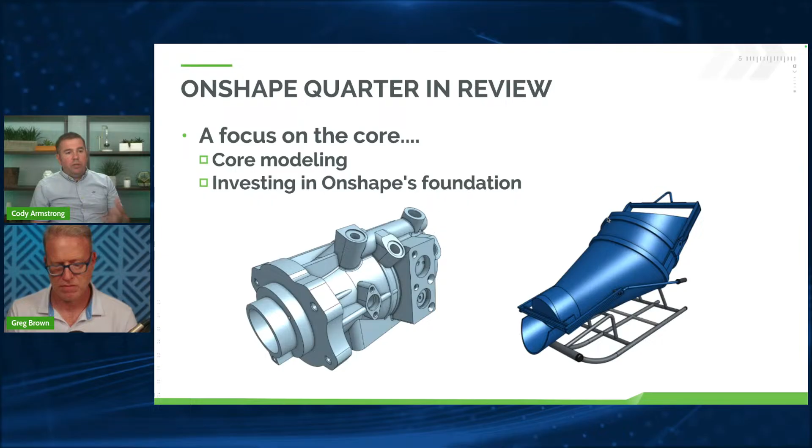And that extends not just to core modeling features like I discussed just a moment ago, but also investing in Onshape's foundation. And that's something I think is really valuable. Something we got a lot of feedback from users on was they really appreciated that time spent investing in Onshape's foundation. And what I really wanted to do was pass things over to Greg and give a brief breakdown into what we did this quarter to focus on the stability and performance of Onshape.

Yeah, thanks, Cody. And definitely this is something a little bit different from the regular schedule of the 17 releases every year, where we jam as many fantastic new things as possible every release, and Onshape's platform is getting wider, broader, and deeper in every possible way. But we did make a very strategic decision in this last quarter to spend 2 whole releases dedicated to what we call technical debt.

And some of the things here, as Cody said, are really dedicated to ensuring that the core, the foundation, the underpinnings of the Onshape platform are as robust and scalable and solid as ever, and also providing a platform that will carry us many, many years into the future. So the dedication of that is really around 2 things.

Firstly, stability and performance. So this is why we did it. We want Onshape to be faster and more stable, more robust than ever before, and providing this trajectory into the future as well. We know this is the number one expectation these days. We don't get or expect a free pass on this, because being the only true cloud-native CAD and PDM system running in a web browser, no one gives us a pass for anything less than stellar performance and stability. And we pride ourselves on that. If we can be better, we will always try and be better, and that's our dedication to that.

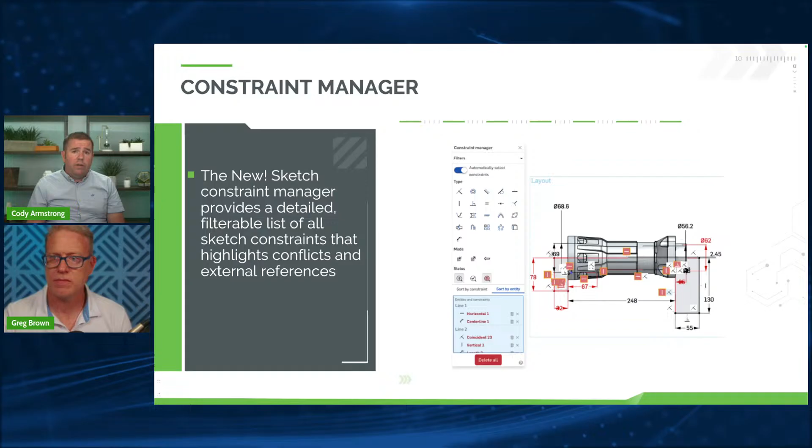It has all these really awesome filtering options that allow you to dig through your constraints and find the one that you're looking for. And I think that's really what this is about, is the ability to dig through and find that one constraint or conflicting constraints and quickly solve that problem, not have to hunt through the entire sketch to find the constraints that you're looking to find. So it's one of those things I think a lot of users will really appreciate, and brand new.

Also in this quarter were improvements to the Repair Manager. Now, if you haven't used the Repair Manager, I'm going to show you how to use it in just a moment. What's really a game changer here is the ability to forward propagate references when using the Repair Manager. And I want to take a second to explain why this is a big deal. The Edit Last Healthy Moment in general uses Onshape's architecture, in particular versions and history, to find that last healthy moment and allow you to compare the two in a repair panel.

And if you haven't used Repair Manager yet, highly recommend it. It's a fantastic tool for fixing your models, right? Fixing broken references, whatever the situation may be. Again, going back to core CAD capabilities, fixing broken references is something we always have to do at some point. And so this gives you a tool to make that easier and faster.

I'm going to go over not just the ability to use it, but how do we propagate forward those changes? So if you have a change to a reference, how do you change it in one place and then push that to all the places where that reference was used? That's really what the improvements around Repair Manager are about. And it's something I think is really a game changer for those that are manually repairing geometry or references today to use that Repair Manager. I'm going to go over an example of why I think this is such a big deal in just a moment. But definitely one of the areas that I would highlight as something we've done that's very unique to Onshape.

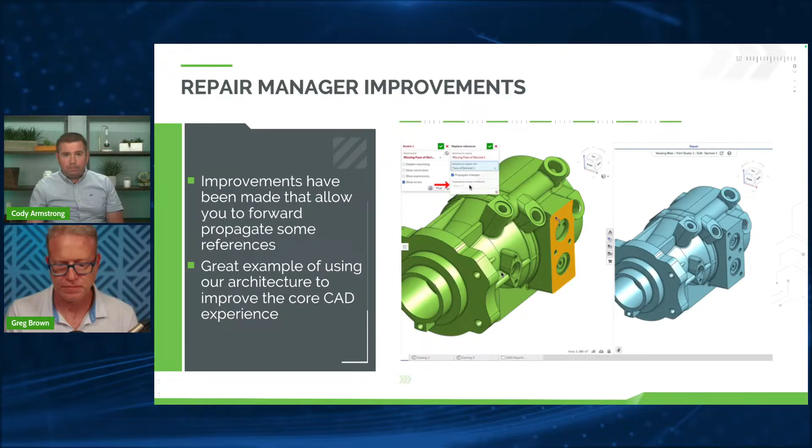And of course, sheet metal. And I mentioned this before, but sheet metal is a core area of focus for us. It's one of those things that we know a lot of users really appreciate. And one of the most requested features we had was the ability to create a conical or cone-shaped sheet metal part, a rolled sheet metal part in the shape of a cone. And we've had the ability to do this for a cylinder for some time, but conical shapes were a limitation that's no longer there.

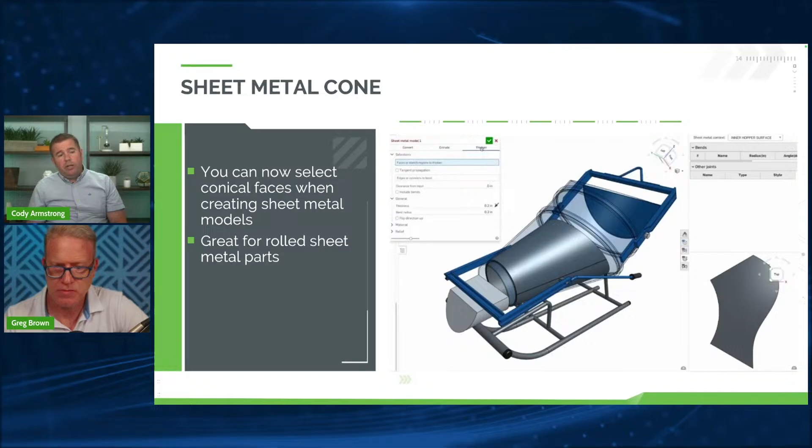So if you're doing a lot of rolled sheet metal cone-shaped parts, this is the tool for you. And I'm going to go over an example of how to use it in just a moment, but it's one of the most requested sheet metal features that we have, and is one that I think a lot of users would really appreciate as they start to dive into things. So that's sheet metal cone, something I think a lot of users, sheet metal users especially, will really appreciate.

And of course, going back to that core CAD theme, drawings. Now, there's a long list of drawing improvements that I could highlight here. So, like I always say, this is just cherry picked, the top improvements that we want to highlight. Definitely go through the what's new, go through the change logs if you really want a deep dive into those improvements. What I really want to highlight is two improvements that a lot of users requested, and a lot of users will really appreciate. And they're subtle things. They're kind of quality of life improvements, but I think will make a big difference in the day-to-day process of creating drawings.

The first, automatic center marks. Like if you have linear patterns and you're using lots of linear patterns in your geometry, adding center marks was a tedious task in the past, and that's totally automated now. And you don't have to do anything for it. It's just there as a default behavior. And it's a really awesome thing to enable for our users.

But also another one that was really highly requested was the ability to define projected views and section views on views with breaks. That was something that many users requested. So if you do a lot of break views, the limitations around the ability to project or section from that were there in the past, but they're no longer the case. And so now these things are possible. These things were highly requested.

Drawings is one of those things with a long tail of capability or functionality, and we want to make sure that we support every possible view option and pattern option. So drawing improvements, if you were to just count sheer number of improvements over the last quarter, this is one of the areas that got the most attention. But the two that I would really highlight are really quality of life improvements that I think a lot of users will benefit from: automatic center marks and the ability to project and do section views off of a break.

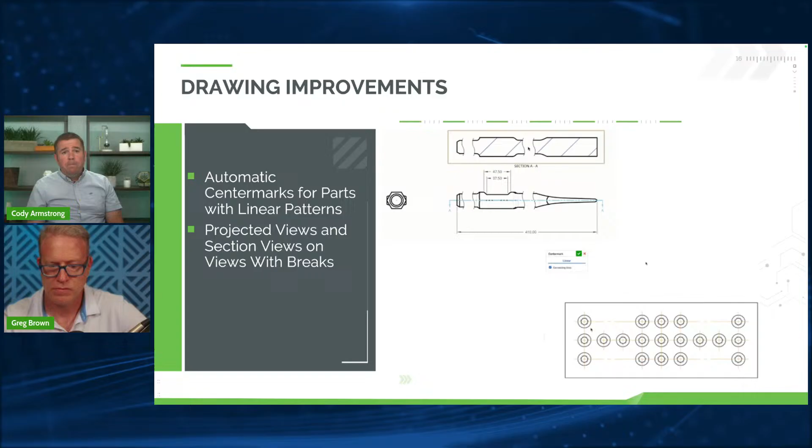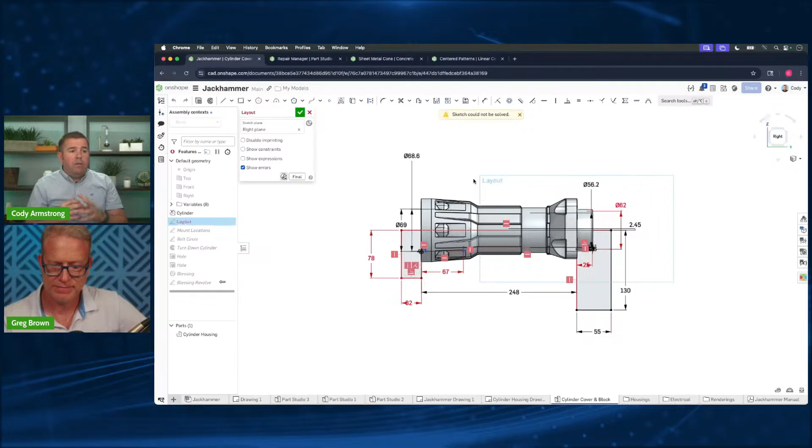So without further ado, I'd like to dive right into a few examples of this. So bear with me for a moment. I'm going to jump into Onshape here. And I want to start with the constraint manager. And the reason I think this is so important is because it's something that we do all day long. So if you do a lot of parametric CAD, you inevitably are faced with a situation where your sketch looks like this, right? And you have red errors everywhere, and maybe you add a dimension or constraint, and suddenly everything blew up, and you don't know how to fix it.

And so oftentimes what we did in the past is you would manually hunt through and figure out what was the last constraint I added, what's it conflicting with, let's delete this, try that, and so on. But there was never a way to just look through the entire list of constraints and pick them out, or to filter them by a specific subset or category. That's what the constraint manager really gives you. And so I can't recommend this tool enough. This is something I think will impact all Onshape users out there, and it's something I think they'll really appreciate.

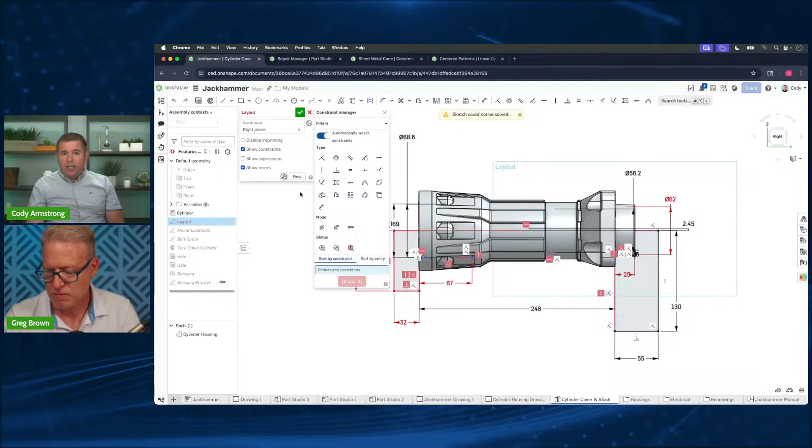In the sketch dialog, you'll have a little button that says Sketch Diagnostics. And in that, you'll see the new Constraint Manager. That's how you launch the Constraint Manager. You'll see the dialog pop up here. And what's really neat about this is, of course, you can do things like filter. That's really, in my opinion, one of the biggest applications for this: I just want to know, show me all the coincident constraints, right? I can do that. I can select coincident, and here are all the coincident constraints in this sketch.

But what's really nice is you could do multiple layers of filters. So let's say, show me all the coincident constraints that have an error. Now I have that one, right? So I can see that constraint.

Or I can filter by other things. Show me all of the external constraints. Of course, external constraints are geometry that's constrained to something outside of that sketch. But now you have a quick way to filter that and say, show me the constraints that are just external or internal.

One of my personal favorites is actually in context. If you ever do a lot of in-context design, knowing which constraints are tied to a contextual relationship rather than just the sketch is a really useful tool. And the ability to just filter by that quickly, I think, is something that a lot of users will really appreciate.

But again, the things I would stress is just the ability to filter through and find all of the errored constraints that you may have, or all the coincident constraints you may have, or the external constraints you may have. And I think one of the common applications for this is I have a sketch. Everything is errored out. I don't know why. Maybe I just want to purge all the overdefined constraints and start fresh. And it's easy for me to just select errors, delete all, and it purges all of those constraints that have an error.

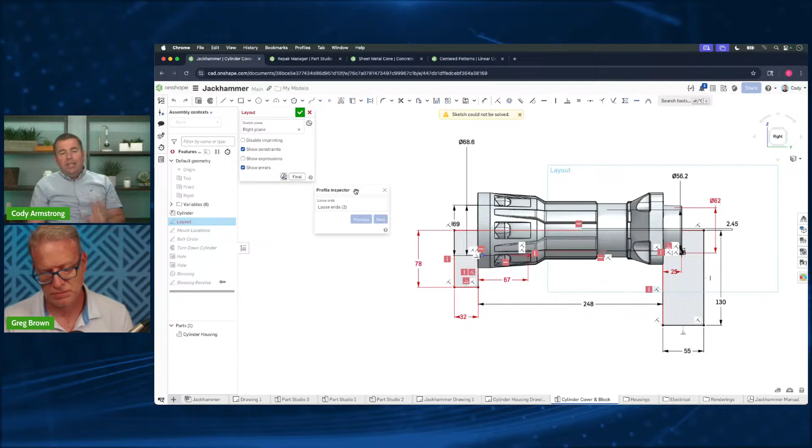Now, a brief tangent while I'm in the sketch diagnostics. This did not come in the last quarter, I believe it was the end of last year, but the Profile Inspector is also in the sketch diagnostics. If you haven't used Profile Inspector, highly recommend it. It's a great tool for finding small profiles or small gaps in your sketches that could be causing problems. It's about 6 months old now, but it is one of those areas that I think a lot of users will really appreciate. The ability to find the tiny lines or tiny gaps and quickly isolate them and fix them is something a lot of users requested.

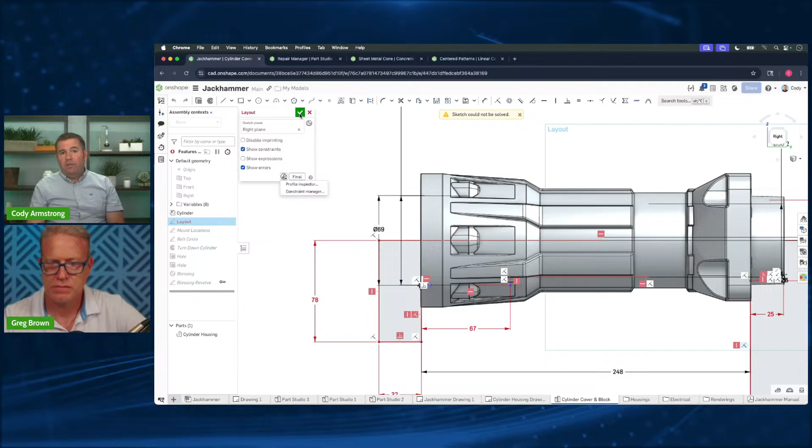And going back to the core CAD theme, core CAD is profile inspecting, it's constraint managing, it's fixing core sketches. And that's really what we're focused on here. The tools for the constraint manager are things that every user at some point will benefit from. It doesn't matter what kind of products you design, there's a strong chance Constraint Manager is going to be part of your day-to-day workflows. And the same goes for Profile Inspector. Both of these I would define as core CAD features that everyone's going to use and really benefit from. So that is Constraint Manager with a quick plug for Profile Inspector. If you haven't used it yet, highly recommend checking that out.

All right, so that is the constraint manager. The next thing I would like to highlight is the improvements around repair manager. Now, repair manager isn't new. What we've really done is made an improvement that is so awesome that we really need to take a moment to highlight it here. I wanted to not only show you repair manager and the core of how it works, but why forward propagation is so important.

So here's an example. I have this pump that I've imported. This is an imported model, but I've built all of these reference features off of it. So if you ever worked with a model, you import it, you build all these contextual relationships, maybe features downstream of that imported model, and then you get a new import, right?

And then you need to replace all those references. And if you've ever done this, it's not uncommon to see a feature list that looks like this, where once that initial import has been changed, all of the references below it may break, right? Now, it's not a given, but in many situations, that is the case. It will break those references and you have to go back through and replace them.

And we've all dealt with situations where you make a change and it causes a kind of domino effect of red errors. And it's just the nature of parametric CAD. But what we've done here is really change how you fix these problems. And the reason I like to stress this is because we're using Onshape's architecture, our cloud-based architecture that automatically tracks versions and history. We're using that to make the core CAD experience of fixing errors better.

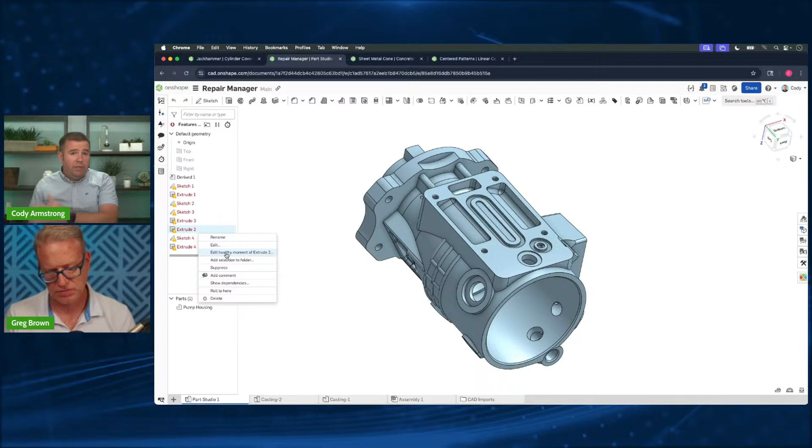But if you haven't tried it, you just right click on a feature that's failing. You'll see an edit last healthy moment of that feature. And what this is doing is it's looking through our versions and history, and it's finding the last time that feature successfully regenerated. And then it's showing you that in the right-hand side. And so you see there, as soon as I hit edit last healthy moment, a flyout pops out from the right, and it says, this is the last moment where that feature was healthy.

And this is the thing that it was selecting. And you can see it there. It's highlighting the face that I've chosen to define for this extrude feature. And the reason this is so important is I can see, okay, a month ago when this was regenerating successfully, that face was the selected entity that drove this extrude feature. So I should replace that with this.

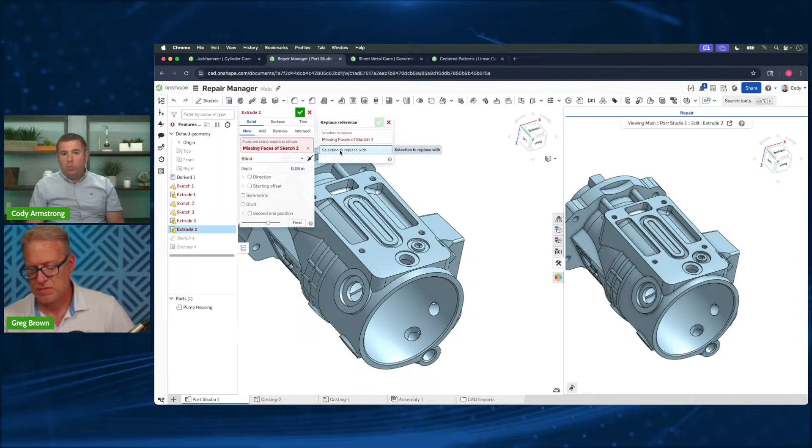Now, Repair Manager has been around for a few months now. What's really awesome and what's really different with this release, the thing I would stress, is this little icon inside of here for replace references. And so if you click this, it'll say, okay, here's your missing reference. What do you want to replace it with? And so all I have to do is select the face I want to replace it with. In this case, I'm just selecting the new face on the new imported model.

But what's really critical here is this is not only replacing the reference in this feature, it's going to go through the entire feature list and find any references to that face and replace those as well. And so really critical, if you find yourself in a situation where you make a change high up in the feature list and suddenly there's this domino effect of errors, chances are replacing some of those references and propagating those changes forward will fix things very quickly.

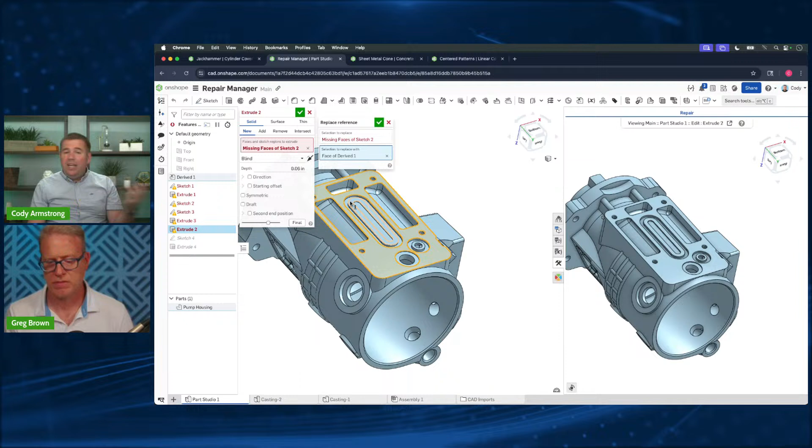And so here's an example where I have Extrude 2, Sketch 4, all of these three features are dependent on this one to exist. And you may have a situation where you've built hundreds of features that are dependent on a single feature to exist. And if that happens, then you can see the domino effect and the amount of time spent fixing it is very laborious. This allows you to say, find this missing reference and replace it in any place in the feature list where it's used. And so now all I have to do is hit the green check. And now I've not only fixed Extrude 2, but I've also fixed Sketch 4 and Extrude 4 that were referencing that same face.

And again, I could have 20 more, 30 more features on top of that that would have also been fixed and forward propagated to fix that issue as well. So it's one of those things I think will make a big difference day in, day out.

This is one of those things, again, core CAD, everyone experiences errors at some point. Regen errors are just a natural part of parametric CAD, going back through and fixing those references, an important part of parametric CAD, and something that we are now doing, I think, in ways that are better than anyone else can because of our architecture, because we have the history and we can see every moment and then push those changes forward.

And the thing I would say about Repair Manager is we shipped it as soon as it added value, right? We shipped it as soon as you had the repair panel and the ability to cross-highlight and fix things interactively, because we saw that added value. But as soon as we had forward propagation, we added that too.

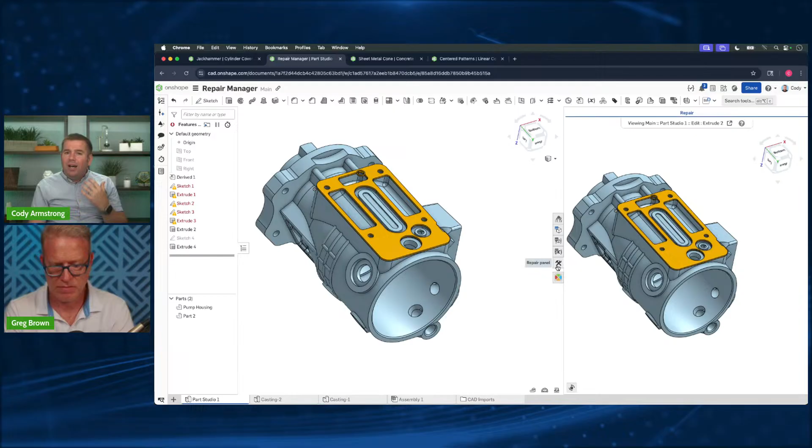And it's not done. This is one of those things that we're going to continue to evolve, because fixing references is one of the most common tasks that users experience. And if we could make that smoother, easier, it's important to us. So it's one of those things that I think is really noteworthy. And I wanted to go out of my way to really highlight that. Not only highlight it, but highlight the fact that we're using our versions and history to make fixing errors better.

And Cody, you made a really important point there about the incremental delivery of this kind of foundational feature. In fact, it's interesting to think back. I remember last year, it was almost to the day a year ago that we released this as an early visibility feature to a few people. It wasn't quite as hot as today is at this end of June, but it was certainly almost exactly a year ago. So yeah, it's interesting that we can deliver value and incrementally increase that for something like this.

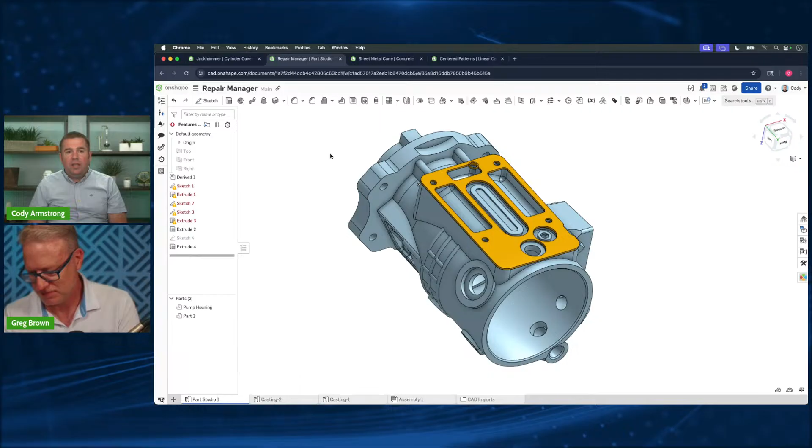But that's one of those things, again, that to me, when I saw it, I was like, wow, as someone who's come from a traditional CAD background, to use the architecture and the history and the ability to track every interaction as a tool to fix the geometry is just genuinely awesome. And it's something I think that really sets Onshape apart.

All right, so the next one that I want to talk about, this is one of the most highly requested sheet metal improvements that we have. And for all the audience out there that's doing sheet metal design, I think you're going to be the ones who really appreciate this one the most. And that is the ability to create a sheet metal cone, or conical sheet metal part.

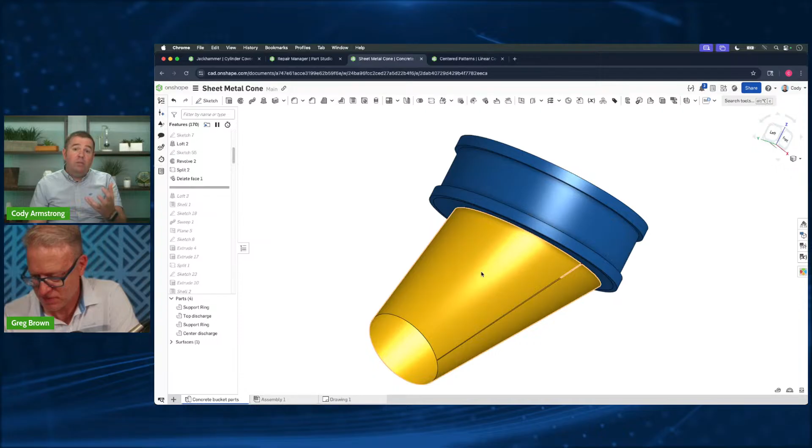So if you're in this situation where you're creating rolled sheet metal parts, we had the ability to do this with a cylinder some time ago, but cones have been a limitation until recently. And the example I'm showing you here, there's a concrete bucket constructed using sheet metal, rolled sheet metal parts that are welded on along a seam. This is an excellent example where you might use a sheet metal cone.

And there's not much to show here. It just works now. And I think that's one of the things I love about Onshape is now when you select a conical surface, you get a flat pattern. There's nothing special about it. It's not a separate feature. You're using the same sheet metal model feature that you've always used. So if you create sheet metal parts, you know the sheet metal model. You have convert, you have extrude, you have thicken, you have the various ways of creating sheet metal parts. Now, when you select a conical face, it just works.

And it gives you that ability to define a cone-shaped sheet metal part and see the flat pattern, the unrolled version of that sheet metal part, so that you can take it and roll it and have accurate values. This was highly requested, a lot of users have asked us for this.

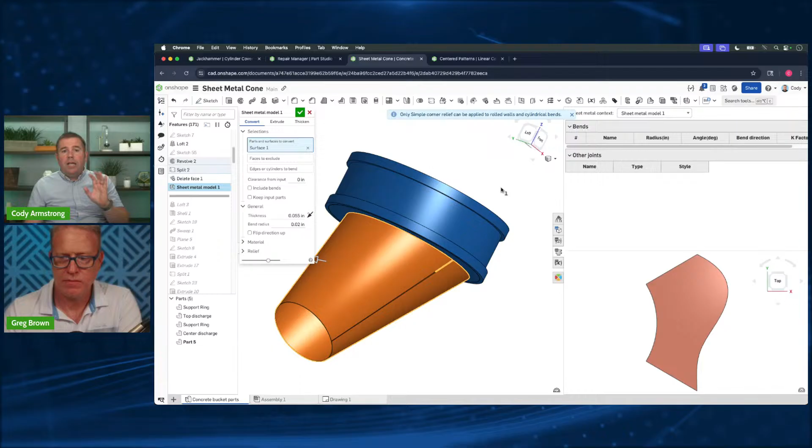Now, the last thing I'm going to mention is you see me using convert to do it, and that works great. You can also use thicken. In this situation, both will work equally well, and both give you kind of the same end result.

The ability to create cone sheet metal parts is, just like the Repair Manager, the next step for us, and one of the areas where we really hope you'll see that incremental improvement that Greg was just talking about as time rolls on. The drumbeat of releases is never going to stop for us, and that's one of the areas that I think people really appreciate.

So that is sheet metal cone and conical sheet metal parts, something I know a lot of users will get really excited about.

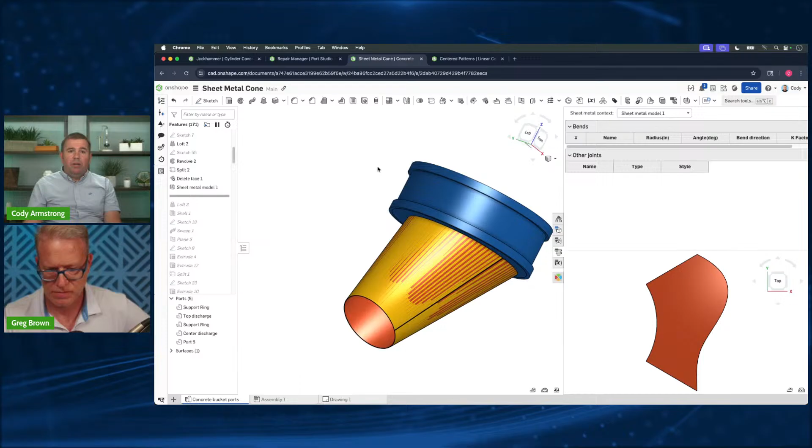The last thing I have to show you, I'm going to switch things over for Greg to do a few demonstrations, is an improvement around drawings. If you were to take a list of all the improvements over the last quarter, drawings is definitely high on that list, because the sheer volume of drawing improvements coming with each release is big. We don't always highlight them because they're not always relevant to everyone, but some of these are quality of life improvements I think users will really appreciate.

So the example I want to show you here is just creating a drawing using linear patterned geometry. In this case, this is a centered linear pattern. Here I have a linear pattern of holes that are centered around that circular hole there, and I just want to create a drawing.

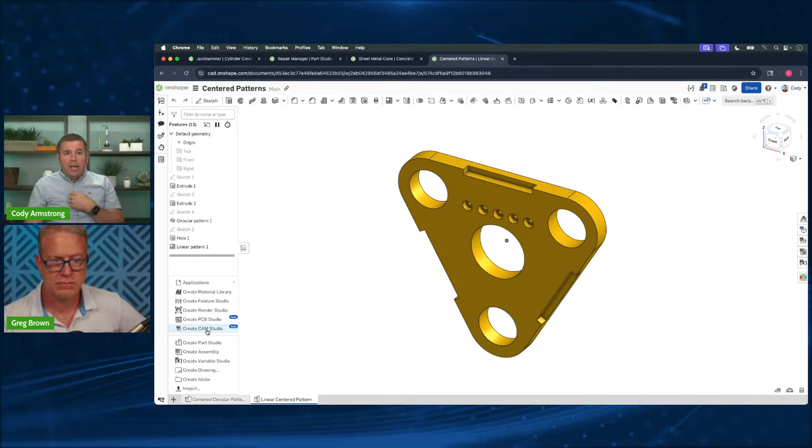So let's create a drawing, and we'll just choose a default template. What I want to do is insert a view. There's nothing really different about this until that view gets inserted. So I'm going to select that linear centered pattern part, and I'm going to drop this into my drawing. What I really want to stress here as I zoom in is notice all of the center marks that are automatically added.

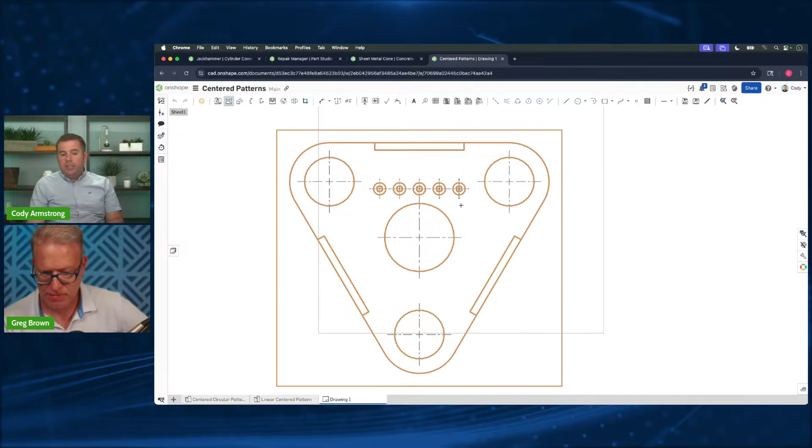Now, in this case, I only have 5 patterned holes, but you can imagine if you had 30 patterned holes in your geometry, the process of manually creating center marks is just a tedious one in the drawing, and you don't have to do that anymore. Automatically, when you insert a drawing view, you have those center marks available for you, and you don't have to do any manual steps to accomplish that.

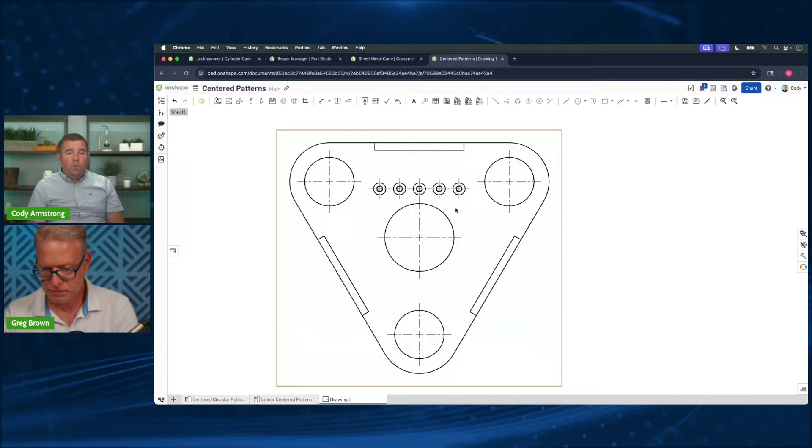I think that's a small quality of life improvement, but one that many users will appreciate, because if you did a lot of linear patterns, it could be a tedious task to go through and define center marks for each of them. So those are some of my picks for the last quarter, and some of the things I like to highlight.

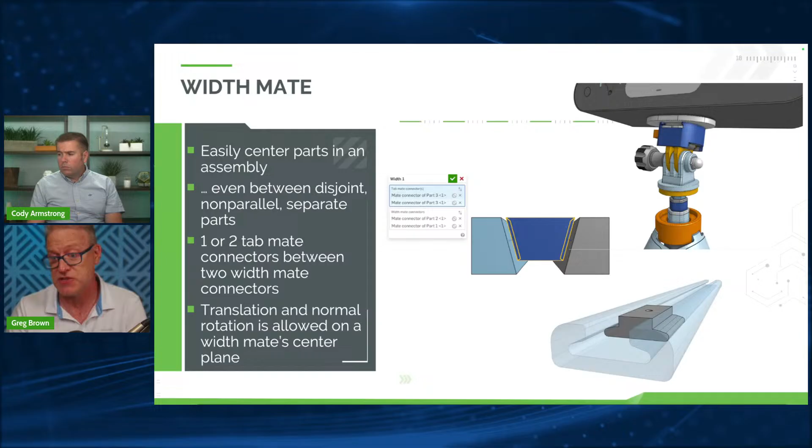This allows you then to apply additional mates, such as tangent, planar, or cylindrical mates, however you need to fully lock it in, or you might want to leave some of those degrees of freedom open. Let me explain that in the form of a demonstration.

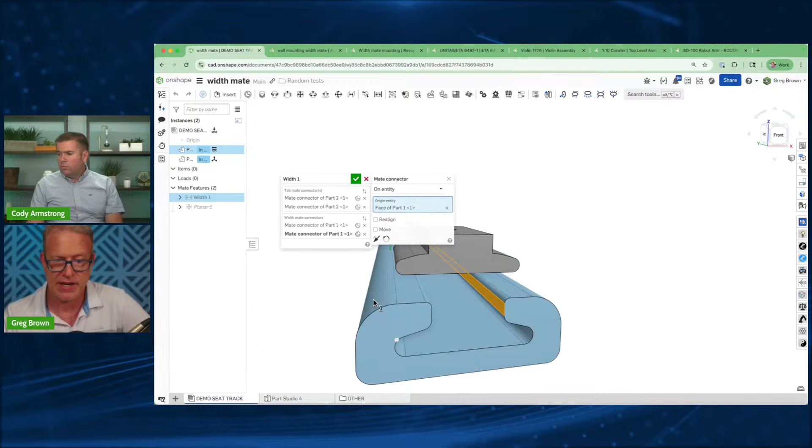So here we've got a seat rail, and I'm just going to put some kind of slot tab into it. I've got my first width mate already done, and you can see here I've got 2 tab mate connectors. These are the faces here that are in orange, and the width mate is down here on the other part, which is a separate part. This is now aligning this perfectly symmetrically, or centered, through there. Now, what it hasn't done yet is fully constrain it.

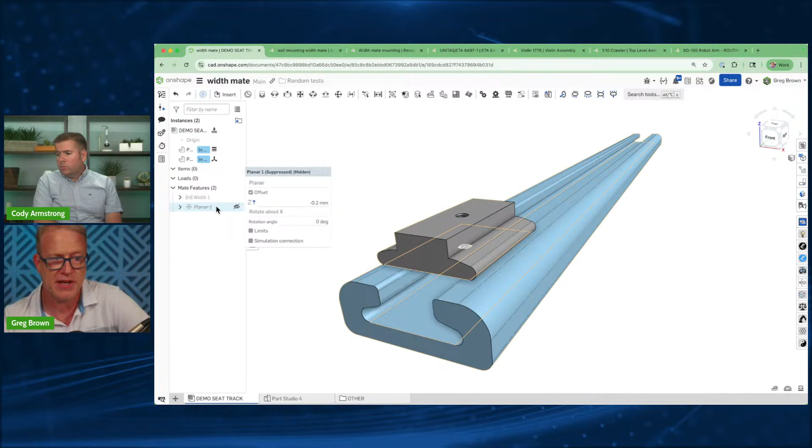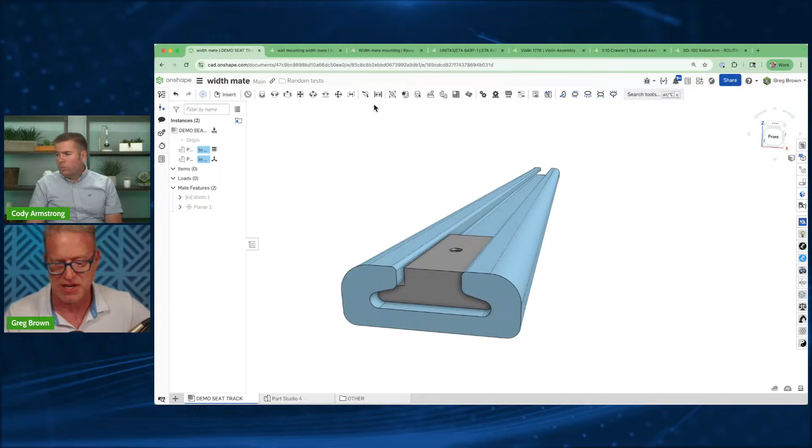It allows it to move in 2 translations that way, as well as a rotation this way. So in order to fully fix this down, or allow the degrees of freedom that I want, I'm actually going to apply a planar mate here. You can see I've put a planar mate with a little offset. If I come in closely, you can see I've got an offset there. Now this just leaves 1 degree of freedom, which is sliding up and down, which I might want to leave, or I could apply additional, say, a tangent mate between these 2 faces, or a planar mate between these 2 faces. You can use these additional alignment type mates to really lock it down into the place you want it.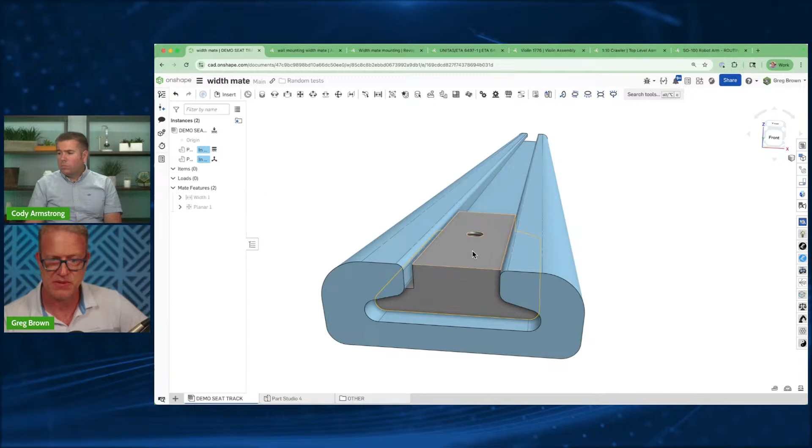This is a really simple one, and the benefit of this and the beauty of it is that these faces here, which are the width mate, don't have to be parallel, and they don't have to stay the same, right? They can change, and the width mate will accommodate that. This is sort of the reality of trying to put things into these kind of slot mechanisms.

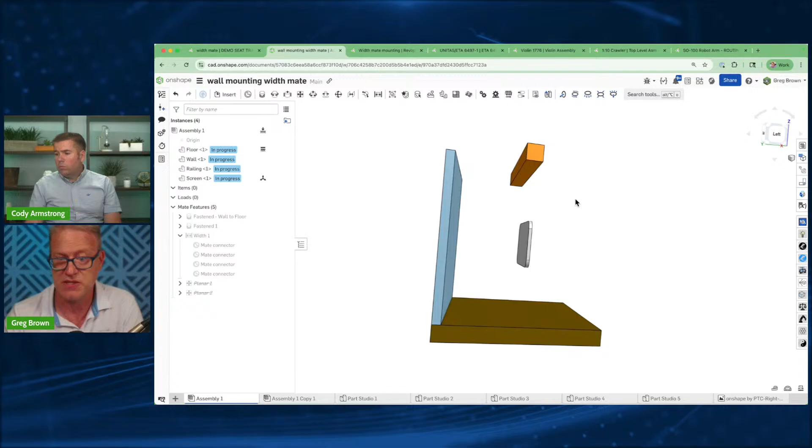Another example of this — in fact this is a really simplified looking example, and it's on purpose, because it can be kind of a complicated thing, so we'll just use something simple here. This actually came at us through the forum. Somebody was asking on the forum, on the What's New, where we have a nice area where we discuss the things that are new, basically in real time.

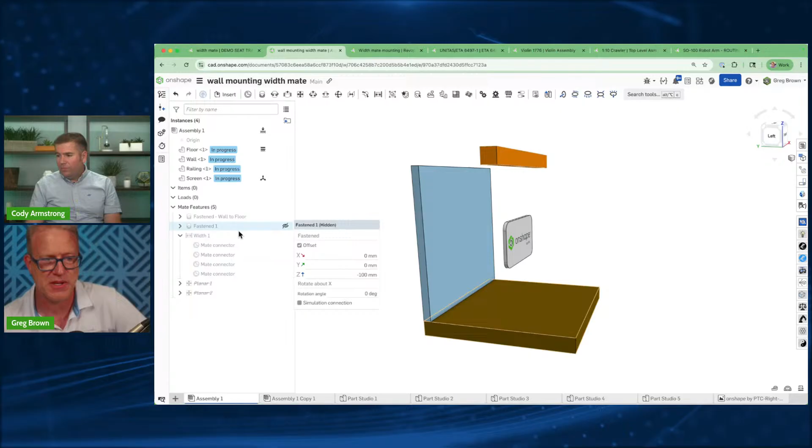So the problem is that this is a TV screen, or a nice poster of your favorite software, and you want to put this on your wall, and you want to align it so that it's exactly centered between the roof rail here and the floor, and we're going to put it some offset off the wall. So first I'm going to use a width mate, and you can see here again I've just used a width mate with these two faces forming where the mate connector for the tabs are going to be. And then I'm just going to use the width mate from this rail here to the bottom of the floor there.

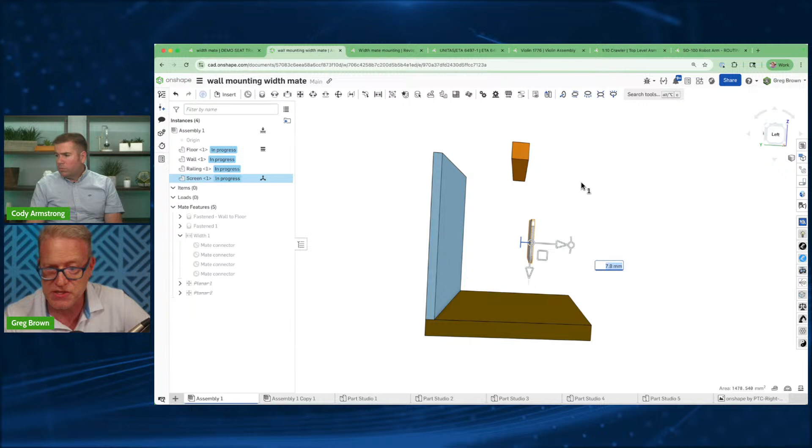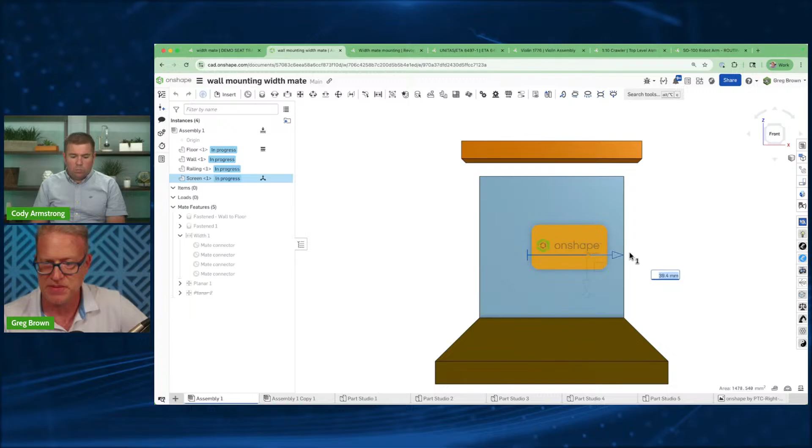Now, as before, this still allows us some degree of freedom on the plane. This plane is the mid plane between these two width mate references, and it can also rotate right around that plane. So maybe we're not done yet — maybe we want to add an additional planar mate to the back of the wall, and I've used an offset here, sort of 10 inches or something off the back of the wall, and we're nearly done. Just as before, there is still 1 degree of freedom left — that is this translation in the local X direction.

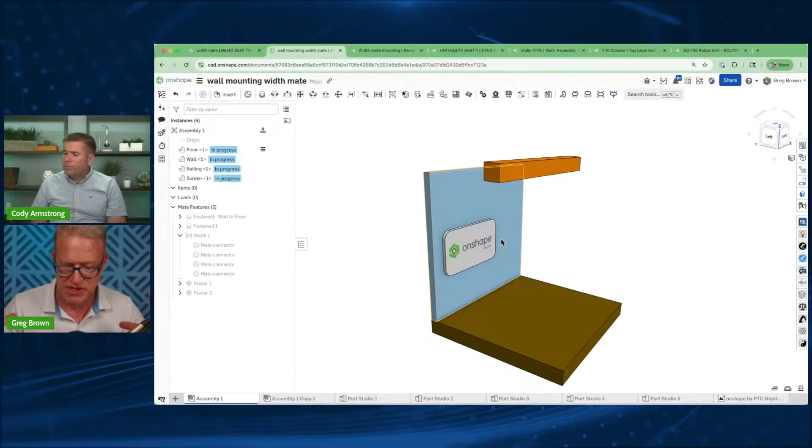So if we wanted to really align it up with this edge here, we could add an additional planar mate or, again, tangent mate. These things add up quite nicely. There's another example I know that Mike LaFleche put in the forum, on the thread about doing this for sort of like a cylindrical shaft rotating between 2 pillow blocks or something like that.

The third example, to make it a little bit more interesting and show you a little level of complexity, I'm going to take out the perspective view so that you can see it directly side on. I've made this roof rail not parallel to the floor, and in fact you'll see as I rotate it, the bisecting angle is how we align the width mate. You can see here the TV is maintaining that bisecting angle.

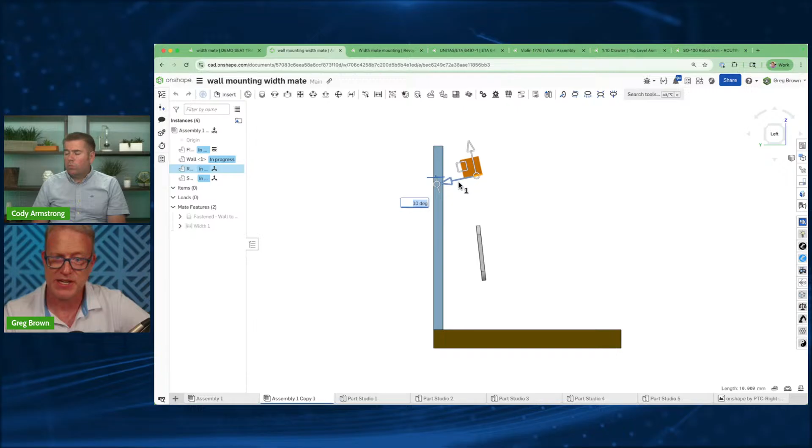In fact, I can also move this up and down, and you see how it's perfectly remaining exactly between the top of the rail and the floor. So you can have some fun with this thing.

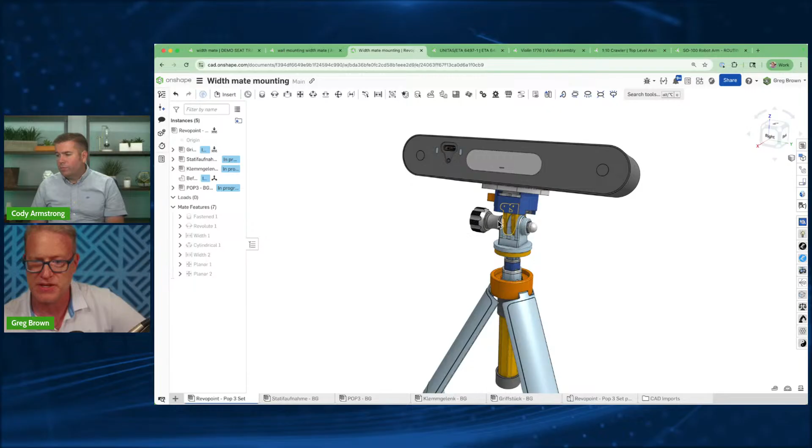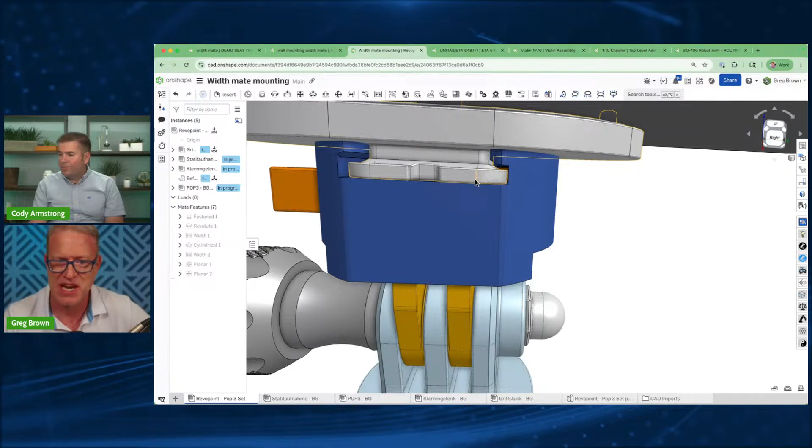It's a powerful assembly mate, and it's going to make life a lot easier, especially when you get to things like this assembly here, a nice scanning tool with a GoPro style mount. This is a good example where you want to center this adjustment screw, center the threaded portion, and there's a little bit of a gap. You also want to center this tab - a good use of a width mate - between the slot here, and then perhaps provide one or two more planar or tangency mates to set this in. A very small number of seven mates really took care of this whole assembly for me, and made it very convenient.

So that's the width mate. Let's go back to here.

The second area I want to talk about is a really nice quality of life and visual improvement, which has to do with transparency. We've always had transparency and isolate tools, but now we've given them a big boost because you can control the level of transparency in the tool, so you can see additional faces that are internal to the transparent parts. This gives you a sense of what detail is going on inside, and you can see from some of the examples I've got here, it's a really nice way.

If you want to use the old transparency, which is a very uncluttered view, you can just slide this all the way to the left, and as you slide it you'll see different levels of that. A really important thing is this button here, which allows you to select the transparent geometry even though you've made it transparent. So if you want to do things like measurements or other selections, you can - just choose this option here and then start selecting.

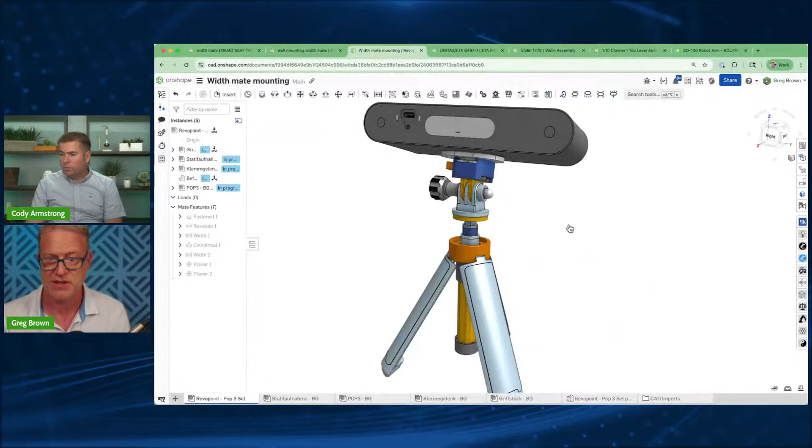It also works really well with section views and measurements, and this is definitely worth seeing live. So something like this - and I see my watch is working a little bit fast, okay, let's set it back. Okay, so here we are.

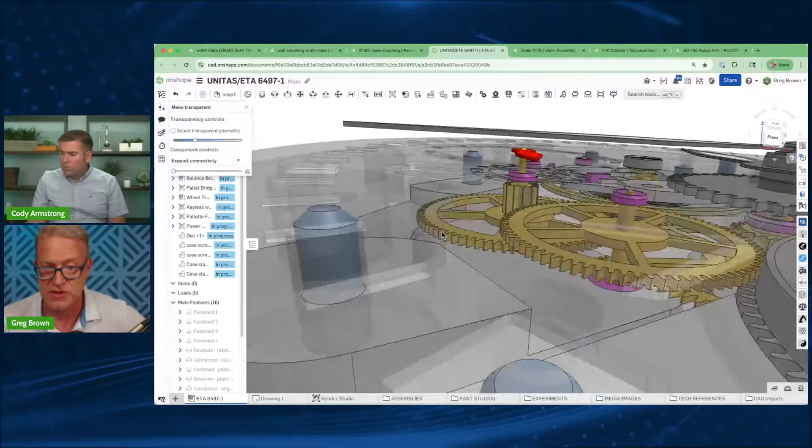I can make certain things transparent just by using the shortcut key - I've got Shift-T. You can see here that the new transparent mode allows you to see some of the internal faces even though they've all become transparent. Now, to compare to the old way of looking at things, this is what it used to look like - you'd see the outside face, but you wouldn't see any of the internal details.

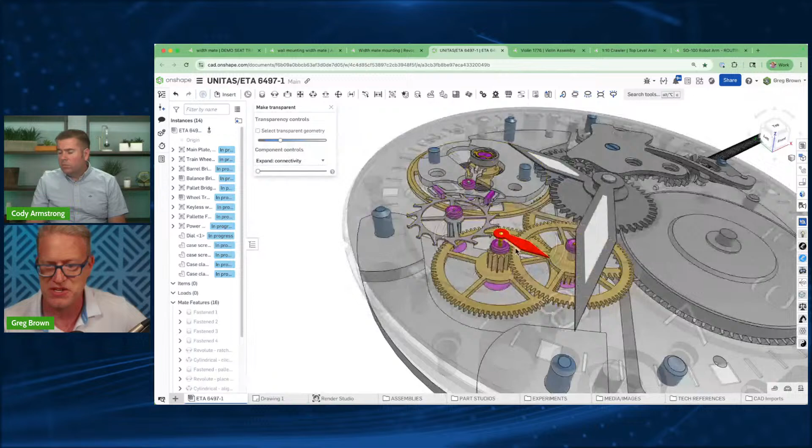So if you want to, you can just slide this across to give you the desired level, and depending on the model, that level is going to be to your taste, and it's worth doing that.

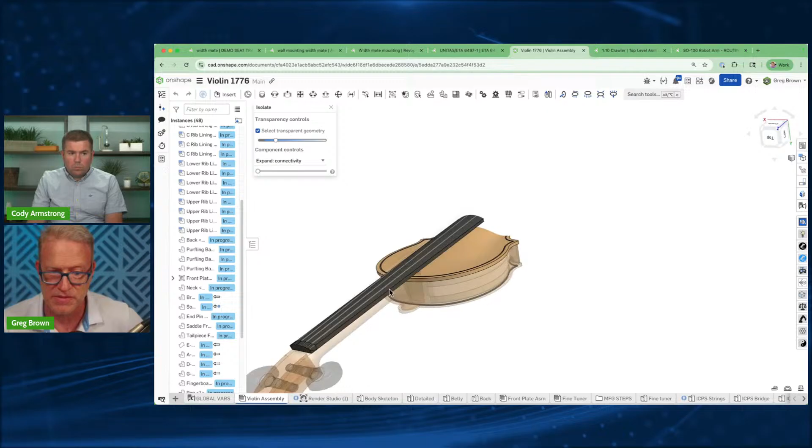So the other thing you might want to do is something like this. Okay, let's build a section this time. Let's cut a section, and we're okay there. And now we're going to use an isolate on two different parts. You can see here, this is a really good example of seeing internal details even though they're in the transparent kind of form.

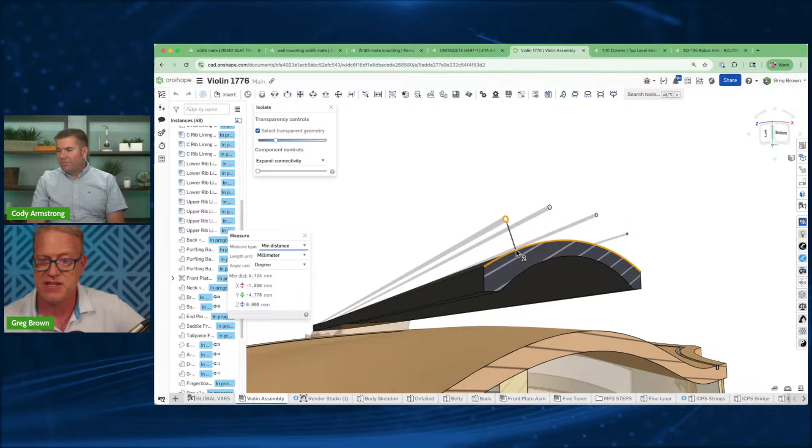And now we're going to use the measure tool, and we can measure between even a transparent thing and something that's not transparent, something that's isolated. And here is the minimum distance between that transparent edge and the isolated edge there. So all of these tools really have come together really nicely and work together in concert, like that.

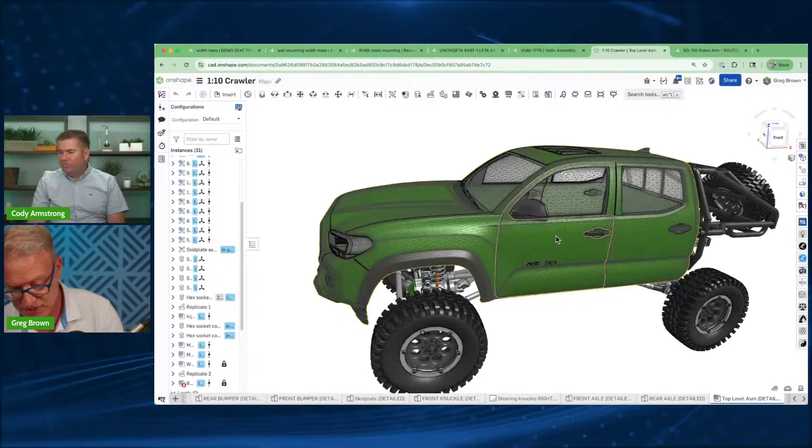Another example of this - a nice one because this is a mesh. The top is a mesh and the bottom is not. I can hide those edges - I use shortcuts for a lot of things, including hiding edges. I can either isolate the surface model, and you get a really cool look at what's going on inside this model, especially if we go back to the differential here.

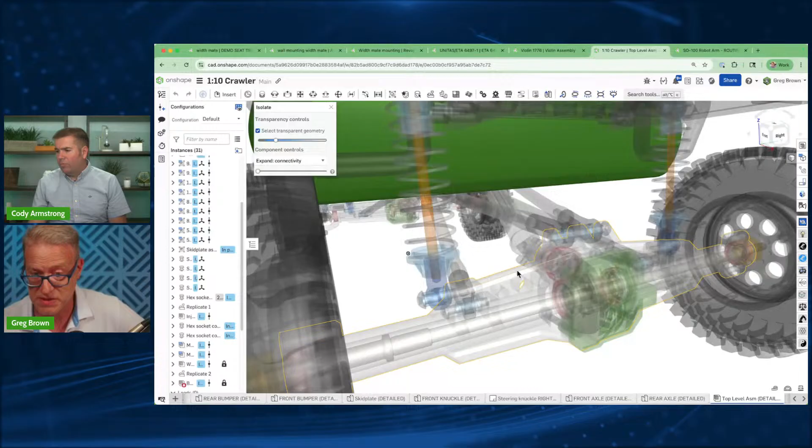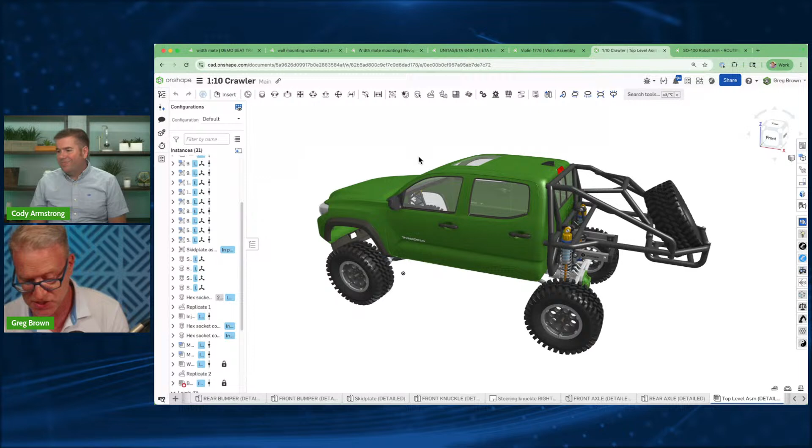Again, I've got the select transparent geometry option turned on, so I can do things like measurements between edges, just as we did before. It's a small thing, but it's a huge quality of life improvement, and for creating images for marketing purposes or for just explaining to your boss what you're doing, this is a really, really nice improvement.

And talking of quality of life things, there's another thing that is not on the list, but I'll just show it to you here anyway. The insert dialog here now can be resized. This is very nice when you have part studios or assemblies that maybe run on very long and you have to see what their real names are, or you've got other documents or paths or folders that have got long names. Now you can just stretch that dialog out.

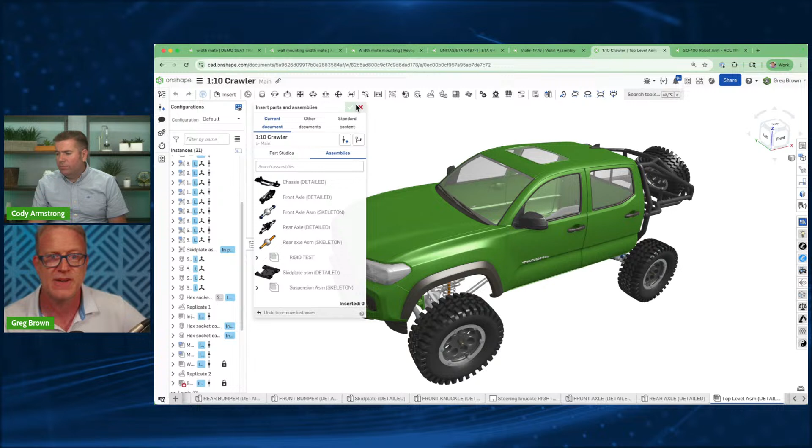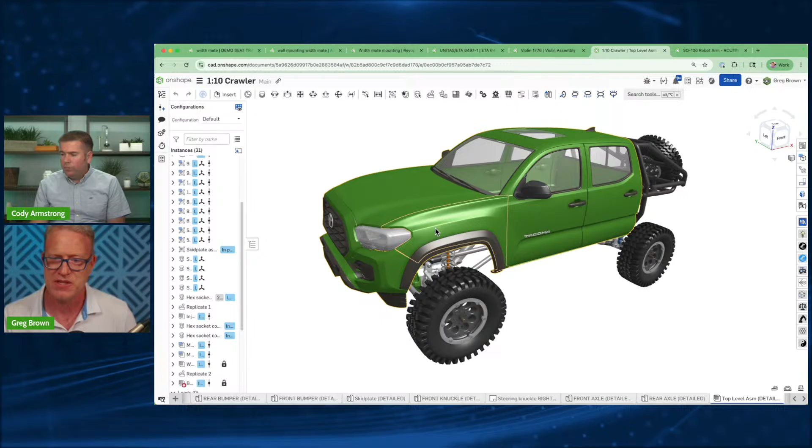In fact, we've taken that sort of approach in other areas as well, including in the bill of materials. You can always do a horizontal scroll in the bill of materials so that it just allows you to see what you need to see. Again, these are little things, quality of life things that just add up over the course of a session or a day or a week using Onshape. And we're always thinking about this when we're thinking about people's core user experience with Onshape.

Now, the last area is with Render Studio. So, we've talked a lot about Render Studio in the last year, since we did this really big push to upgrade and modernize and Onshapeify Render Studio. And we're continuing to do this. In fact, in the last quarter, we did at least 4 pretty major things.

The first is, we can now match the scene properties of what you're currently working on in Render Studio to a previously created Render Studio tab, whether it's in the same document or even in another document. So we've got this thing called Match Scene Properties, and you can choose whether to match any or all of the settings here, like the scene itself. Then there's lots of controls over the renderer, whether you're matching the environment, which is essentially the lighting and the ground and the dome model, and then the named views.

And there's a lot of things captured in a named view. Think of it as the camera: all of the settings to do with the camera, things like the depth of field, the perspective settings, the position and rotation of the camera itself, the tone mapping, the clipping, even the background if you've got something like a nice backing plate in there. All of that can be copied in or referenced in from a previous successful shot that you've set up. That is this match scene properties, and with the named views as well.